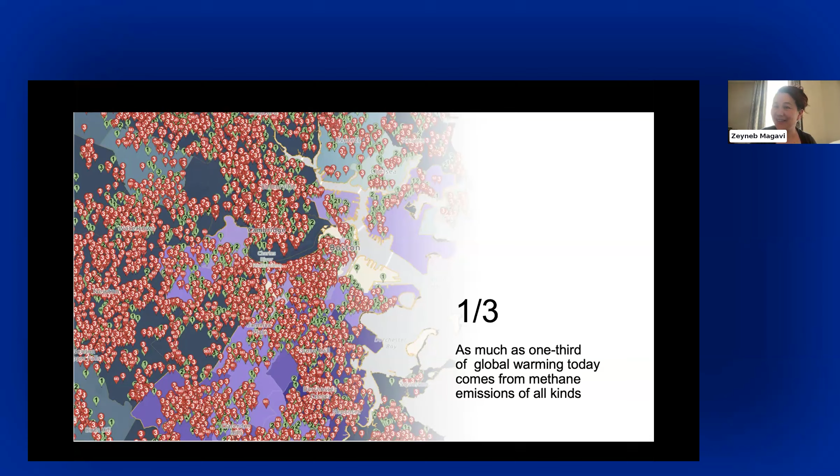And I think that relationship is a part of this story. So this gas leaks work was really the foundation of it. It was a long and wonderful story that I'm not telling today, but we have cut significantly gas leak emissions in Massachusetts thanks to a method co-developed with all of us.

And in the process, we also realized that another way we were cutting gas leak emissions from aging infrastructure was replacing the gas pipe with new gas pipe. And every time a gas pipe goes in, it takes decades to pay off, and it's paid off by ratepayers paying for it over decades.

So this is the latest number from some analysis for how much the U.S. is investing in gas pipe between now and 2050. It's a huge number, $1.4 trillion.

So why is that? And this is not even a parallel number — this is just by 2035 instead of 2050, an estimate for the amount invested in electric grid infrastructure. And this map is for downtown Boston, and it's all of the capacity constrained areas on the electric system.

And so it began to dawn on us that we had a kind of multipolar crisis in our energy system. Without even talking about climate, setting it aside, we're at the end of a lot of aging infrastructure. We built our infrastructure in an era long ago, 100 years, and we now have a kind of end-of-life situation with a tremendous amount of aging infrastructure and a tremendous amount of investment needed.

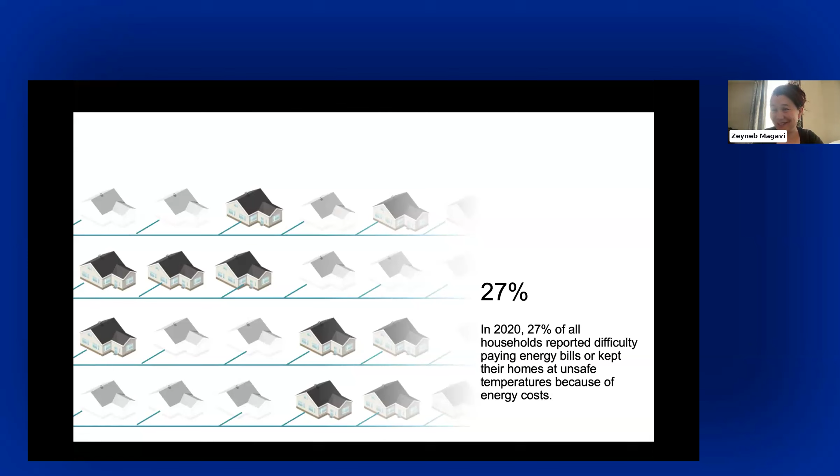So how do we reinvest, rebuild our energy infrastructure, which is the basis of our economy, in a way that does not exacerbate or could potentially even help solve the affordability challenge? Oh, and jobs, of course, is linked. I'm just making this as complex as possible.

And there's this number I got from the gas industry: 4.1 million US jobs. I'm not totally clear on the boundaries on that, but there's a lot of jobs. We can all agree on that. There's a lot of jobs in the gas industry and in the electric and building all of it.

And so we end up — I'm just framing, and I could keep going with all of the challenges that intersect — but I'm just framing that the question we end up with is: how do we keep ourselves comfortable as humans in our buildings, affordably, reliably, safely, and sustainably? And if we are going to try to solve this puzzle, how do we do it while not harming the climate?

And so that's the setup for HEET's approach to this. And again, with engaging all stakeholders, which the title alludes to, we really do. There have been many meetings where we have substantially worried about and talked about avoiding fights. And we always have, just for the record.

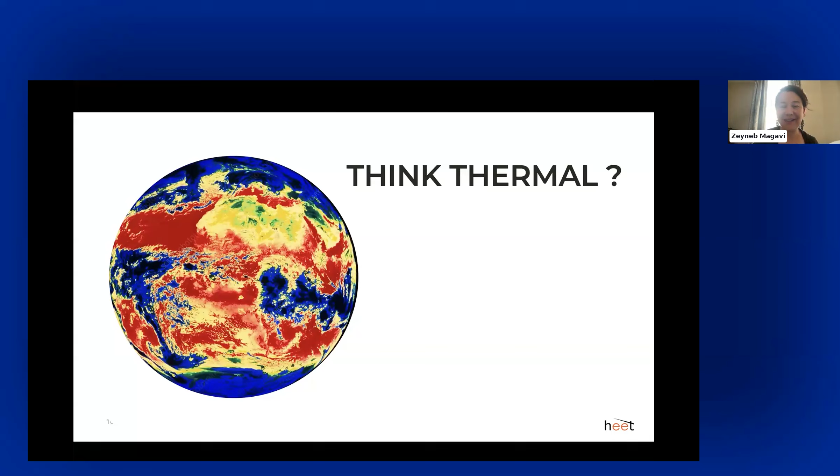The Earth is absorbing heat energy from the sun. It's also holding more thanks to greenhouse gases. So we have both natural thermal energy, which allows us all to survive, and it's increasing.

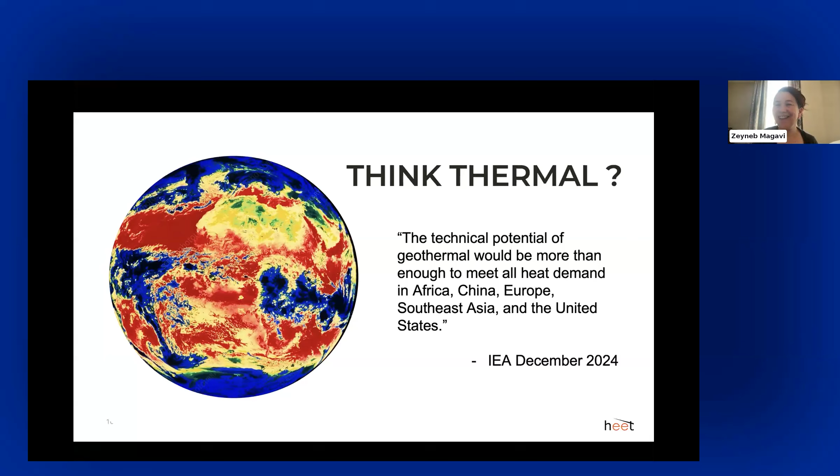This is a note from the International Energy Agency, IEA, which did their first ever geothermal report, and that heat energy in the surface of the Earth, bedrock, water, rivers, is geothermal. They basically said in a sweeping statement that there's enough geothermal to meet all heating needs. They did not model cooling needs yet, so we're going to work on that one. To give you a sense, we have enough thermal energy naturally there to heat all our buildings. That's a crazy statement when you think about it, and it's really founded in science.

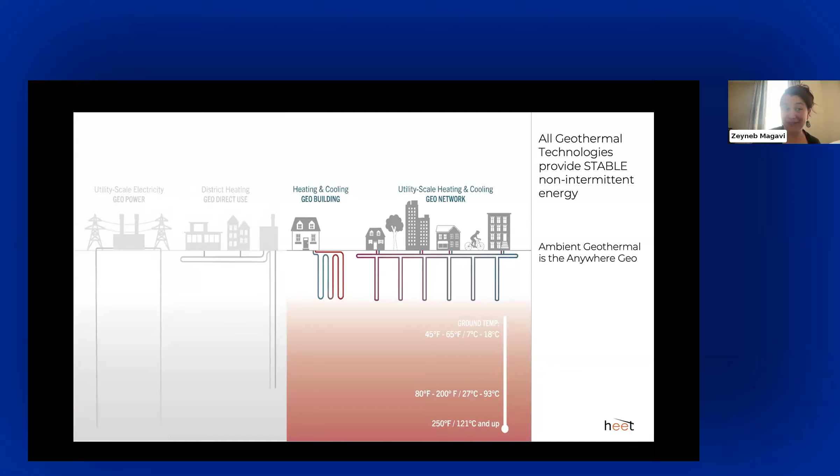When I said geothermal, I just want to clarify, because the word geothermal does mean a lot of different things. It's actually more like a family of technologies, and it provides stable, non-intermittent energy, no matter where and which technology. But all of those ones on the left, if you're thinking about Iceland and hot lava, that's not what we're talking about today at all. We're talking about that surface of the Earth, quote unquote shallow. I prefer the word ambient to shallow. It's the anywhere geothermal, no earthquake risk, no high risk of locating the only place that it exists. It is everywhere beneath our feet. So just clarifying on that.

I have a little beautiful hand-drawn video by a former HEET employee that I'm going to play for one minute that explains how the system of network geothermal puts together pieces that we already know into a new thing that taps this geothermal energy. So I'm going to give it a go here.

Right beneath our feet, the Earth is soaking up energy from the sun, and it's been doing this for a long time. Near the surface, the ground warms and cools with the seasons, but lower down, it stays at a constant temperature. In Massachusetts, that's 55 degrees Fahrenheit year-round. This stored temperature is a source of renewable energy. It can be accessed to heat or cool a single building without using fossil fuels. But did you know we can also connect entire communities to that renewable source in the ground?

How does it work? It starts with underground pipes in the streets, sort of like gas pipes, but filled only with water. The water absorbs the ground temperature of the earth and delivers it to buildings. Pipes connect buildings with different heating needs, so energy is never wasted. Instead, it's exchanged between buildings or stored in the ground until it's needed. Inside, a heat pump moves heat in or out according to the temperature you want. This system of pipes can connect like Lego blocks, gradually moving us all from gas to geo, giving us cleaner air, efficient heating and cooling, and a healthier planet.

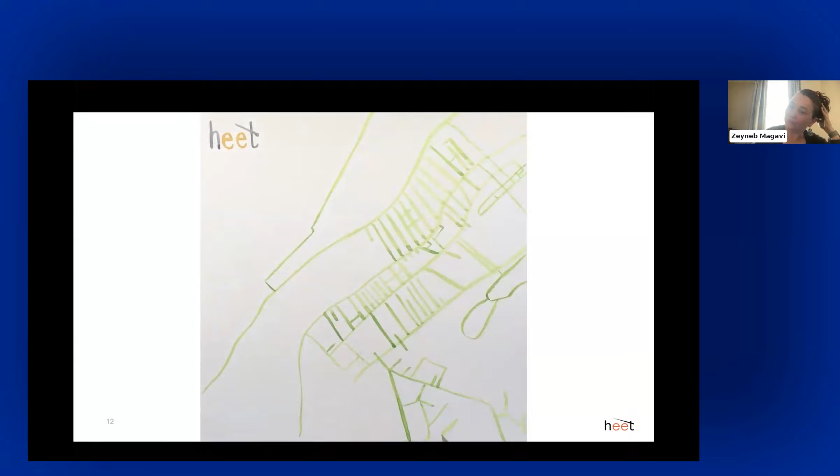The idea for this networked geothermal system, run at a utility scale, originated at HEET, a climate solutions nonprofit. Learn more right beneath our...

Almost hit play again. So I'm just going to wrap up my explanation and turn it over soon.

The pieces illustrated in that video are: the buildings have a geothermal heat pump. There's a distribution system, which is a pipe of water in the street, kind of like your gas pipes in the street, except it's filled with water, water with glycol if needed for antifreeze. And then there's geothermal boreholes and also any other thermal energy resources you might have available, which opens up a whole thermal market as you scale. And there's a bunch of thermal resources that are available in that range that are not useful at all until you build this thermal network.

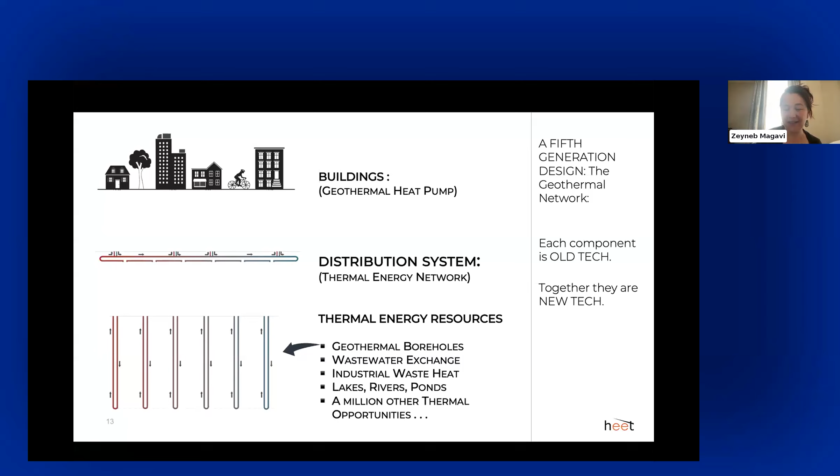So each of the components that were illustrated are absolutely old tech. I mean, we're talking pipes and pumps. Geothermal heat pumps have been around for 50 years. Geothermal boreholes last longer than 50 years and also have been around. But when you put them together, you have new technology. And that's actually kind of exciting because we need to move forward quickly. And we know the pieces put together work. In fact, we're very lucky today to really get to hear about what's illustrated here as that first demonstration project.

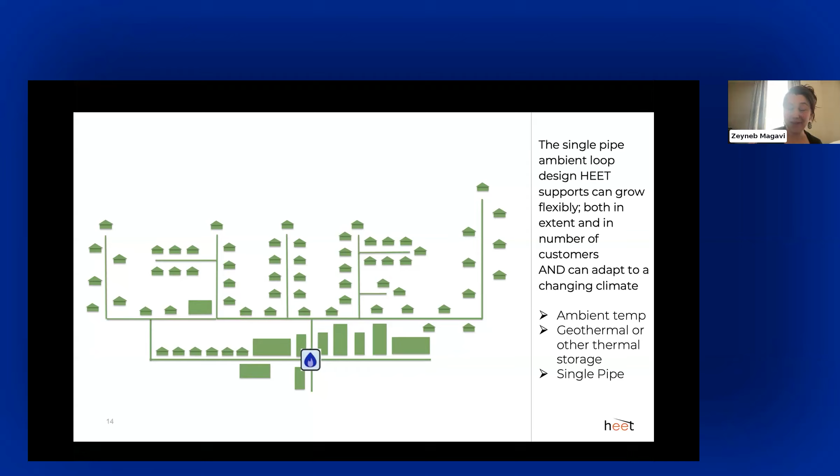Part of what I want to make clear is that the specific design of this matters. Having what we call a single pipe in a loop in an ambient temperature range is a really critical part of the design that allows it to be utility scale. It'll work fine for one project with a lot of other designs, multiple pipes, different temperatures, but this scalability and also the efficiency we get from that is really essential to that utility growth model, which allows you to then build the next loop and the one after that, and incrementally build a regional scale thermal network, and therefore you have built a thermal market and really transformed the basis of our energy system.

So I'm going to pause there, because what we set out to do was demonstrate that all of these system requirements by the wide range of stakeholders - these are the requirements that would allow everyone's core needs to be met to move forward - we wanted to show that they were possible, not entirely, but just possible.

I want to turn it over now to Eversource Gas, who was the first to respond to our feasibility study and file permission to demonstrate the technology.

Thank you, Zeyneb. I think I'll jump in here. That was a great overview and nice video. You have an artist on your team for sure. That was really cool. And I will bring up my slides here.

I appreciate being here, and a great setup from Zeyneb today. I'm going to talk a little bit more about the specific pilot that we have at Eversource, which is in Massachusetts, and step through what's happened out there so far, what we see in the future, and a few policy updates.

I think why we are where we are today in Massachusetts. So this pilot is in Framingham, Massachusetts. Framingham is just west of Boston, a small city. It was selected as this pilot participant, and this project was actually proposed in what's called a rate case for one of our operating companies in Massachusetts, N-Star Gas.

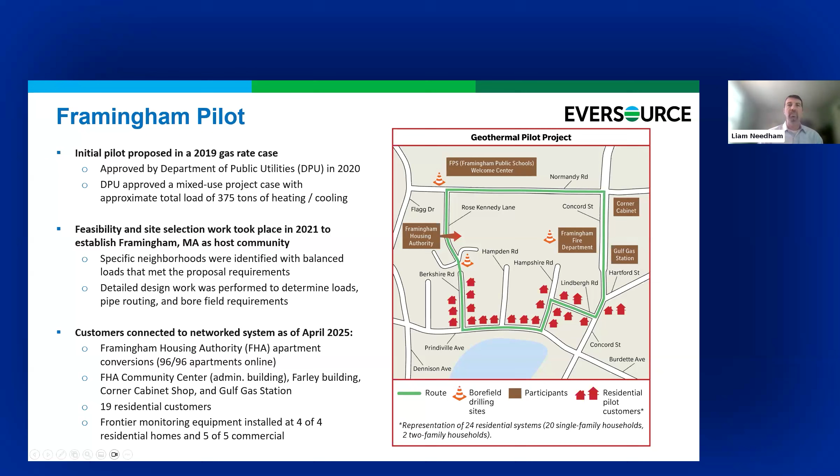We did lots of mailers, webinars. We have an ongoing newsletter, updates around the project as well to community members. So we've had a lot of support there.

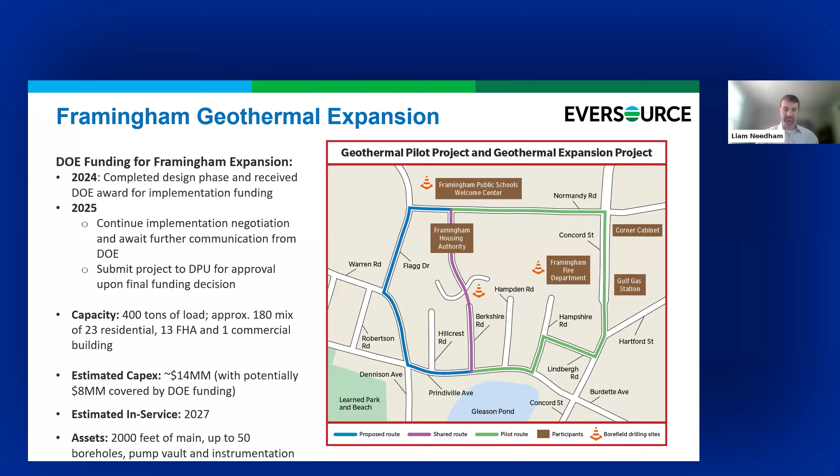I wanted to just talk about new construction in the market for it. This project in Framingham is a retrofit. So most of the homes and businesses along this route, prior to having the geothermal heating and cooling system installed, either were heating with natural gas, oil, or electric resistance. Actually, the Framingham Housing Authority had electric resistance for all their units. And then most of the units either didn't have central air, or they simply had window units, or no AC units at all. So that's a change for them.

But retrofit is difficult, particularly in New England with an older housing stock. A lot of buildings have forced hot water systems, they have baseboard heating, might not have ductwork. So a lot of that work in the home that we facilitated is tricky. The homes weren't designed that way. Installing ductwork and making room for new systems can be difficult. And it's invasive in people's homes, to be honest. So it's a lot of work, and it's tricky.

So new construction presents a different type of opportunity. And this really, if you think about a design component, if we built it up and had a design for a network geothermal or any sort of geothermal project from the jump, that's going to help in terms of cost in getting new homes onto a system. And there's some partnership components there as well.

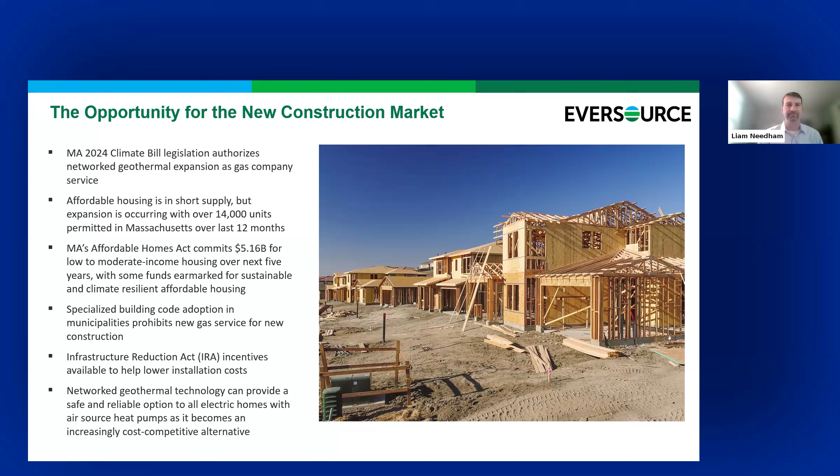So kind of this new construction, major renovations component, I think there's an opportunity to reduce the customer side costs, as I mentioned, reducing the actual capex and network geothermal. We think as we get more projects and learn more in drilling, there's some competitive bids that we could use, kind of reduce that upfront cost as well.

Zeyneb hit on this a little bit as well. Geothermal energy is very efficient. So Zeyneb had a slide there about the cost for building out the electric distribution system. There's a lot of money and there's a lot needed to support electrification, full electrification particularly. And geothermal is one way to help reduce those build out costs by having more efficient heating and cooling equipment, to potentially reduce build out costs on the electric side, and as I mentioned, just provide an alternate option to electrify the new building stock here.

Before I wrap this up, you may think, well, why the heck is Eversource Gas Company doing this? Well, Eversource is set up really in kind of three main business units. We have an electric distribution company, so we operate in New Hampshire as an electric distribution mostly. We have electric transmission, so those are long haul, bringing energy and electricity long haul to the distribution system. And then we have our gas distribution system, which we operate in Massachusetts and Connecticut.

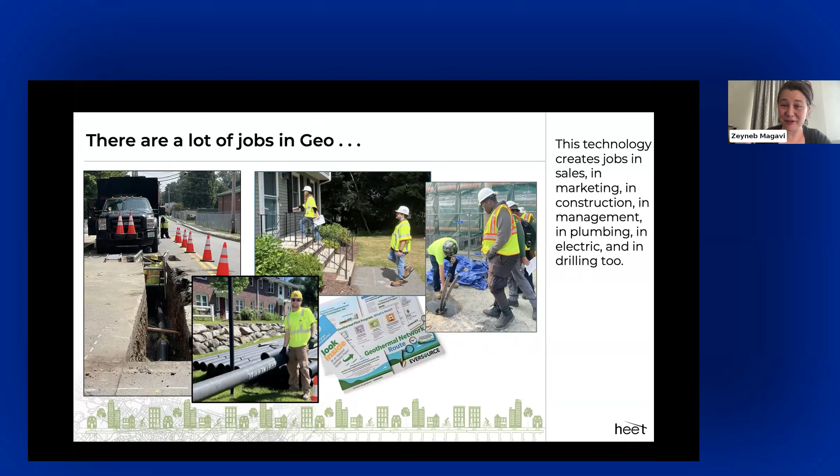Just for visuals, this is the site you just heard all about, and I'm going to try to do kind of a lightning round of what happened next. I've got a few pictures here I'll leave up for people to see because I think they're amazing. On the left are a bunch of gas workers installing geopipe, which they did seamlessly. They went from one week to the next and back again, from gas to geo and back to gas. Same with so many of the jobs, but the geothermal drilling jobs are the gap, which we have been building a regional effort and training to try to address.

Even outside of this network geothermal, there is a gap in geothermal drillers for individual homes or schools. So that's an exciting thing, is that there's just a lot of jobs for people.

And I want to mention that first project, Liam kept mentioning the kind of partnership, and there were actually structurally present partnerships, including HEET leading a research team that brought scientists and researchers from all over the country together around this project to learn as much as possible in order to answer as many of your questions as possible with data. And we built a techno-economic model, a national, actually global database of these projects for everyone to learn from, and so much more. That was a wonderful learning and collaborative process the whole way through, with exciting outcomes coming soon.

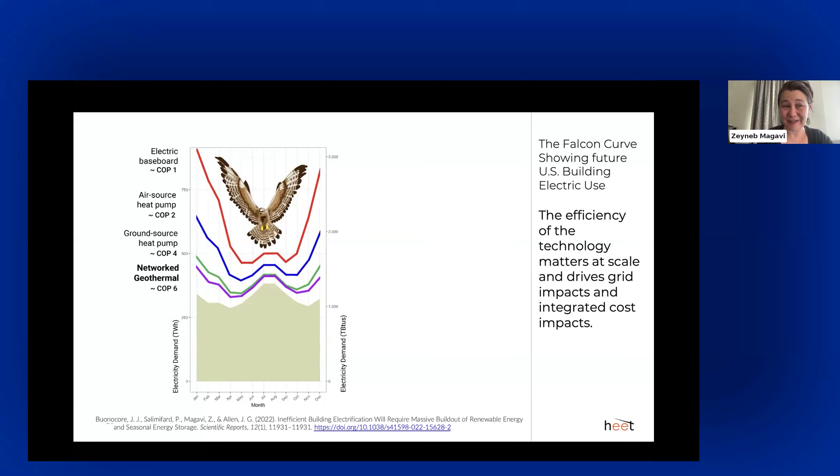I want to mention, because I think this is so relevant and important, that one of the things we are confirming with this project is the impact on the electric grid, and the idea that you could move that many customers in Framingham to electrically run heat pumps without raising the load on the electric grid is a critical one when we think about our whole energy system and costs, just like Liam said.

So I just want to jump right in and say that this project and others that are in the ground and operating have really shown and demonstrated in various places that each of these is possible, which is a stunning outcome. I just love this picture as well.

One of the most powerful examples was the New York legislation, but it's been happening across the country. The most recent legislation that passed was in Texas. Who's opposing, I guess, is the question.